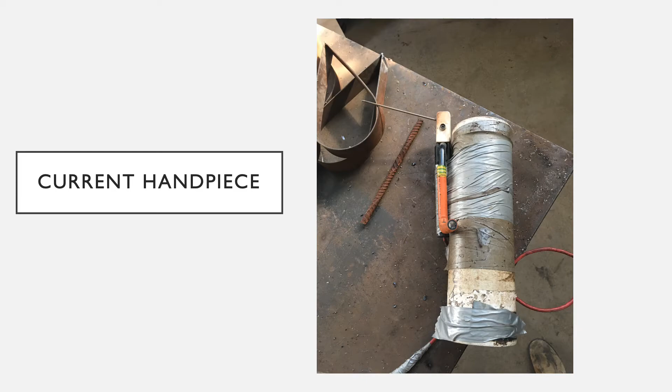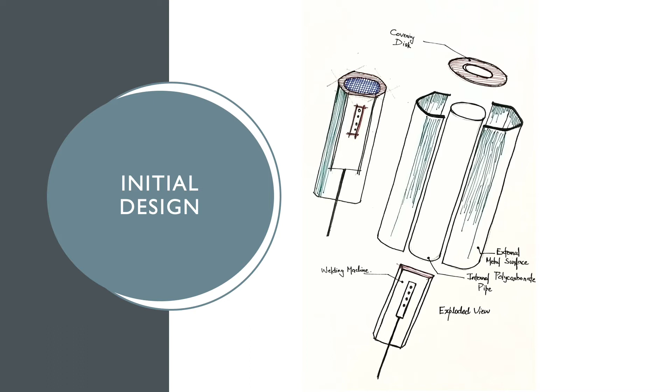Previously, I have presented this design. This exploded view shows the main cavity in the middle, where the hand is inserted. It is surrounded by a layer of materials and the outer metal surface. Pinhole jacks with different diameters are installed for easy fixing and unfixing of different welding rods. This is the interior view of the handpiece, showing the location of the hand inside.

So this is the main feedback I received from Peter. He asked for more details on the clamping mechanism of the handpiece. I appreciate the feedback he gave me as it was used to improve the design and make sure that his main concern is incorporated into the final design.

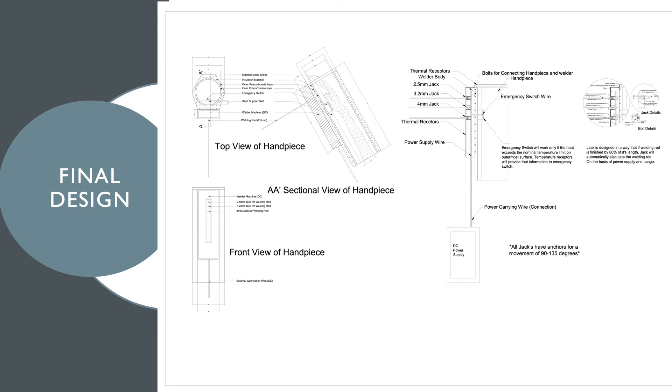So this is the final design. It is still composed of two main parts, the sleeve and the welder part. This time I have put more details on the welder part. The welder part is installed with pinhole jacks of different diameters for fixing and unfixing of welding rods. This will be explained in detail in the following slides.

This sketch shows the clamp details. Two clamps are in the picture. One is for 3.2 millimeters and the other is for 2.5 millimeters. These are the two welding rod sizes that Peter usually uses. These clamps are located in the welder part of the handpiece, which is also attached to the sleeve part.

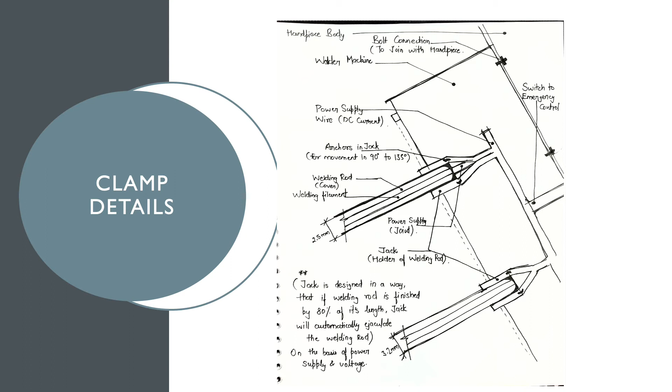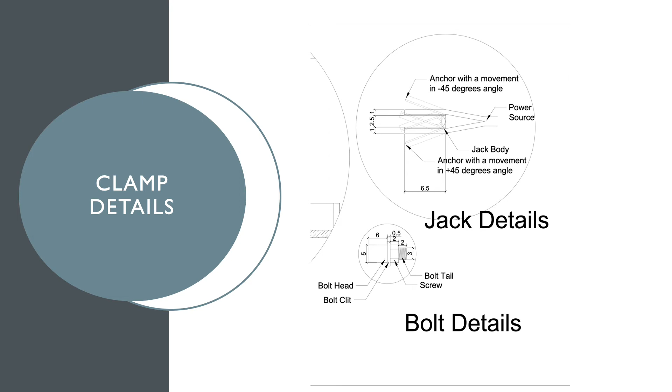The picture in the top right shows the jack details. The welding rod sits in between the jack body, where it is connected to the power source at the end of the jack body. An anchor that can move at an angle enables Peter to move the welding rods in different directions. This is important so that his body and hand movements during welding are minimized.

The picture in the bottom shows the bolt details, which is also important to keep the welder part of the handpiece attached to the sleeve and immobilized.

This sketch shows the locations of the three different jacks. One for 2.5, the second one is for 3.2, and at the bottom is a jack for 4 millimeter welding rod. Although he only uses 2.5 and 3.2 millimeters, the third jack is an extra provision in case he needed a bigger welding rod. It also shows the location of the power source line, thermal sensor, and the bolts connecting the sleeve and the welder part.

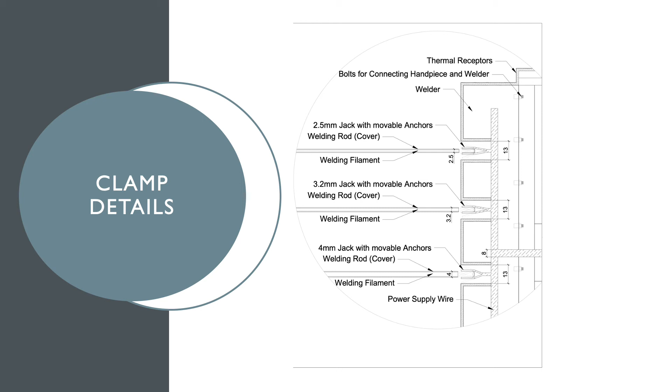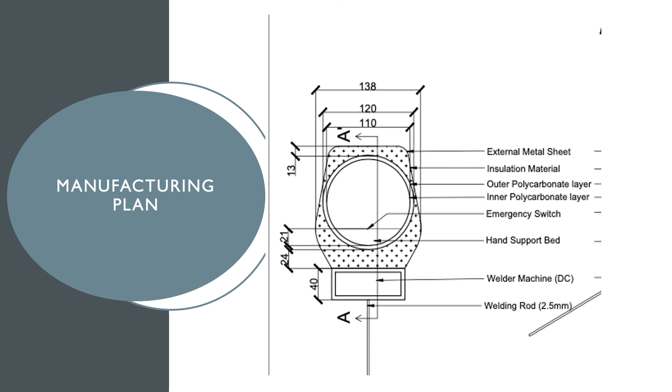As for the manufacturing plan, the layers of the sleeve are designed for comfort so you can work for longer durations. So these are the layers of the sleeve. The innermost layer is made of textile. It's followed by a polycarbonate layer which provides the main structure of the handpiece. The polycarbonate layer is covered by an insulation material to keep the heat away from his hand. Then finally, a metal sheet to keep the insulation material in place.

As for the welder part of the handpiece, this can be fabricated using the least electrically conductive metals. Titanium and aluminum are poor conductors. However, titanium is relatively expensive, making aluminum the preferred choice. Also, Peter aims to have the handpiece be lightweight, making aluminum the sensible choice.

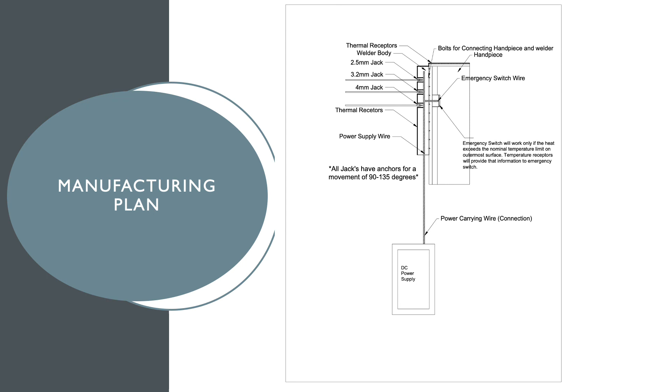The anchors in each of the jacks are installed with springs, and they are fitted between the anchor and the jack body. This is to give the anchors movement during welding. Further feedback from Peter on the design is much appreciated and will be noted. And he will also be asked for material preferences for the manufacture of the handpiece.